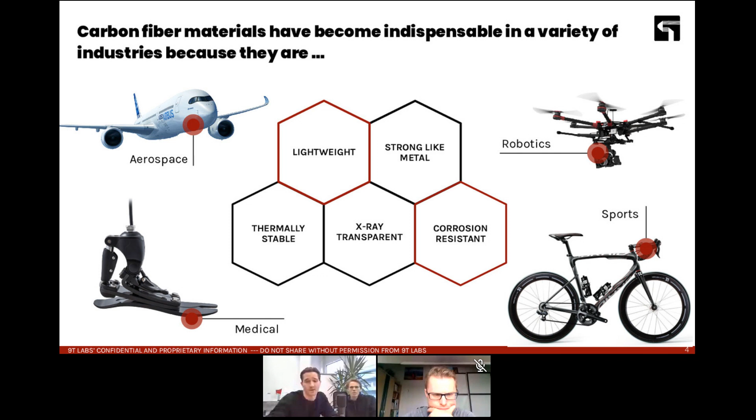Let's jump one step further into the processing of those materials. In a way, there are 2 worlds. One is the manual world, and one is the automated world. If we first talk about the manual world, there's a lot of hand layup. This is an interesting process. It's easy to use, easy to apply for various processing techniques, and it's scalable when it comes to size. So you can manufacture quite big parts, but also really small, tiny parts. This is great, but there are also drawbacks using hand layup. One of the biggest disadvantages is that you actually make a huge compromise on the fiber layup.

And this is not an optimized fiber layup. We only use those fabrics because if we do hand layup, that's the only way workers can actually handle this material. So we do a compromise on the fiber layup, and also, and this is not listed here on the slide, we also have a lot of material waste because we always carve out the geometry out of those fabrics.

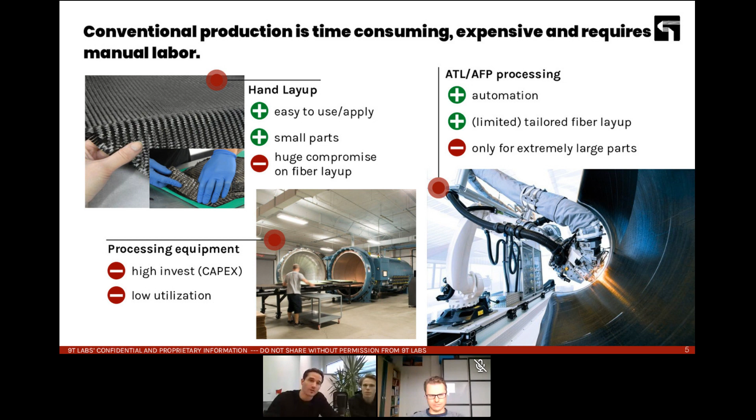If we go one step further and take a look at the next need, which we already touched on in the slide before: automation. A big trend, big need for the industry, usually just to drive down costs, but there's also another factor, and that's the human factor. We can reduce human error, so we have more reproducible layups or more reproducible parts.

And if you have everything from one hand, as we say in German, it also reduces the friction between the individual parties, and so reduces the development times and also the lead times for going from an idea to a final part.

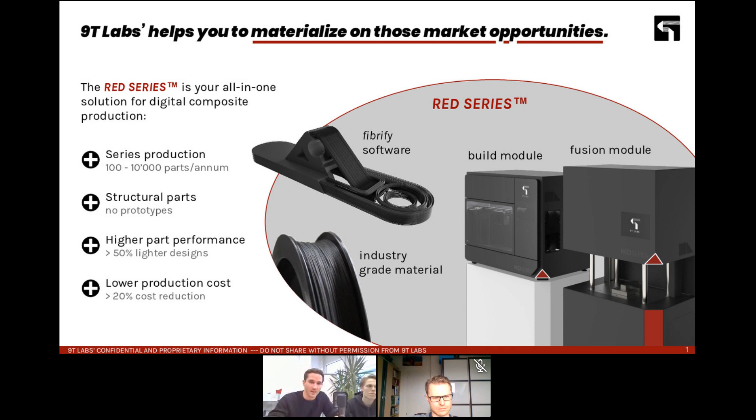So now we talked about the purpose of the RED series. And now I want to explain to you what does it actually bring you? What are the market opportunities that the RED series enables for you? And I group this in two fields. One is metal substitution of CNC milled parts. This is actually a really hot topic.

A lot of people wanted to substitute those really thick and small, quite complex parts with composite materials, but conventional technologies don't really enable this kind of manufacturing, this kind of complexity, this kind of thick structures. And that's exactly what we are offering with the RED series. So you can go into this metal market and substitute existing CNC milled metal parts.

And just imagine, this is actually not getting a slice of the composite market. It's actually expanding the composite market. So it's kind of creating a new market for metal substitution.

And on the other side, we have the substitution of conventional manufacturing technologies. So we bring in the software, we bring in automation, we bring in these integrated workflows to really drive down the cost and reduce the structural weight of parts to get better performance and be competitive in this kind of market. And there it's about substituting existing conventional technologies.

So those are the two big market opportunities, and they are not mutually exclusive, but it's important to understand that one is about expanding the market and the other one is about substituting the existing technologies.

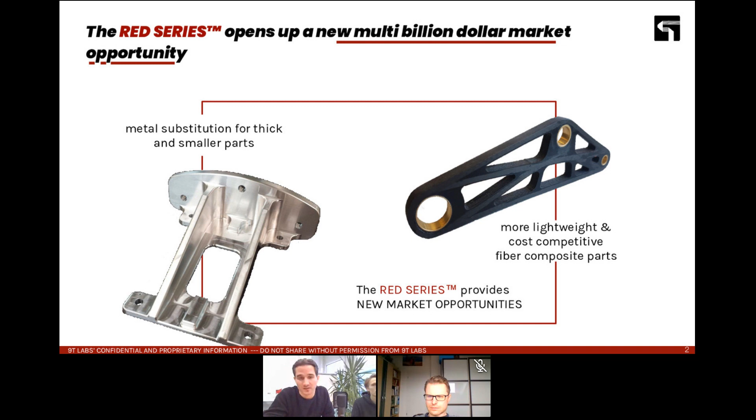Okay, let's move on to how we differentiate from other technologies out there. Maybe a general comment: continuous carbon fiber 3D printing, or continuous fiber printing in general, is actually quite a hot topic in academia, but also a few commercial players are already out there. And you might also know other companies like Desktop Metal, Markforged, and Anisoprint.

And what I want to really explain on this slide is that the differentiation is really driven by the market focus. And our market focus is, as I mentioned before, on structural parts, so load-carrying structures, on series production, not one-off parts. And all the other technologies out there are really serving a different market, which is called the prototyping and jigs and fixtures market. And the requirements for those two markets are completely different.

And if we now go further and talk a little bit about the product offering, I separated this into materials, software, and hardware. We see that actually to serve this market, it requires a completely different product offering. So now let's talk first about our product offering.

So to serve the structural composite market, we need materials which industry already knows. They need to be industry standard, industry grade. And also we have to talk a lot about supply chain, that we are not the only source of material, that we basically have a global supply chain in the background that is really reliable. And we can also ensure the quality of the material first, and then of the parts. And we also have to have competitive pricing. That's simply because if at the end 80 to 90% of the part costs are material costs, this will not enable series production. This will not accelerate the adoption of this technology.

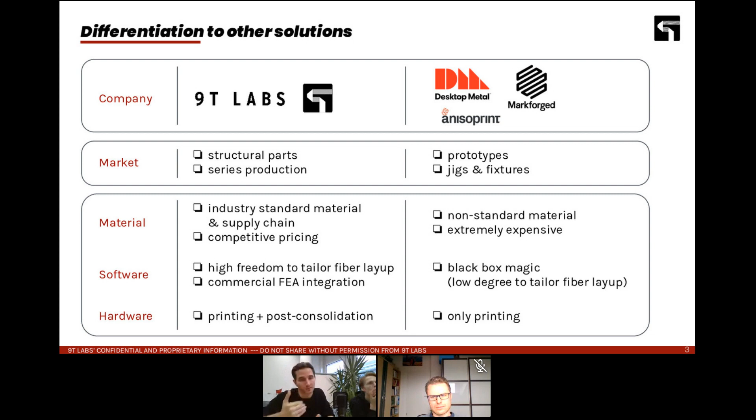And last but not least, on the hardware side for the jigs and fixtures and prototyping domain, all those companies are really just offering a printing system. It's okay because their market does not require any post-consolidation, any enhancement of the part quality. So for me, it was important to showcase on this slide that it's really about the market, and the product offering basically answers those market demands.

So this was the first section, the introduction, introducing the RED series, and now we want to go into the details.

I think I actually have to turn on my sound. I had to put my sound off, so I don't always hear the questions coming in.

Okay, so now it's time to go into the next part of the presentation, which is the product details of the RED series. And we'll start with the materials. So for industry grade materials, at the moment we will offer two materials. One is a PA and the other is a PAEK matrix system with high fiber volume content, 60% fiber volume content, and continuous fibers. So you see that we have really high performance materials, high strength, high modulus, and that's just the beginning. So basically the tip of the iceberg.

We will gradually add new materials to the portfolio, but that's the material offering we have right now and how we launched the RED series. Now, important also to understand is that we are not a material producer. So what we are doing is we certify industry grade material that's already on the market and make it accessible to be printed in our RED series system.

So that has many different advantages. For one, you already know the material you're using with the RED series, but we can also rely on this global supply chain. We might dig in later in the question phase, but I will not talk more about this on this slide now. It's an interesting topic.

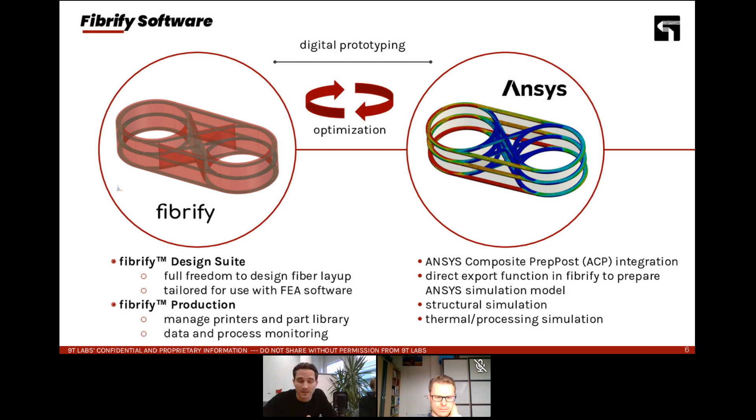So now let's go further into the physical world. Once you have found your most optimal design, then you can apply our additive fusion technology, AFT, which is a two-step process, as I mentioned before. So we have a build module and a fusion module. The build module is where you actually have the automated fiber layup. You can just imagine it as the execution of the software. And it's enabled to do plastic printing and carbon fiber printing. So you can have these hybrid parts, which are quite important if you go to really complex geometries and architectures.

The build volume is fairly big for a desktop-sized machine, so we are 350 millimeters by 270 millimeters by 200 millimeters in build volume, and the system is comprised of a heated print and material chamber. And now, what comes from the build module is actually a tailored preform. That's how I usually call it. And this goes into the fusion module.

In the fusion module, it applies pressure and heat, so it increases the part quality, the consolidation quality. So we're talking about reduced residual void content and also higher interlaminar strength. And what's really unique about this fusion module, it's a completely modular system. So we use rigid tooling to provide the shape and the geometry of the final part, but it's a completely modular system.

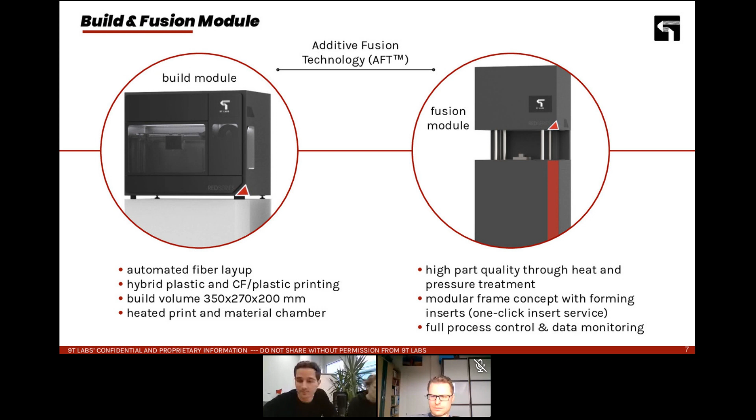Okay, and what comes out of the fusion module is your final part. So you see now here is just an illustration of the part we have seen before. This is an automotive motorsport bracket. I don't want to go into the detail of the application, but it's important to understand that what comes out of the fusion module has an extremely low residual void content. So we're talking about something below 1% void content, and that's important because that's the only way to go into the structural applications and also series production applications.

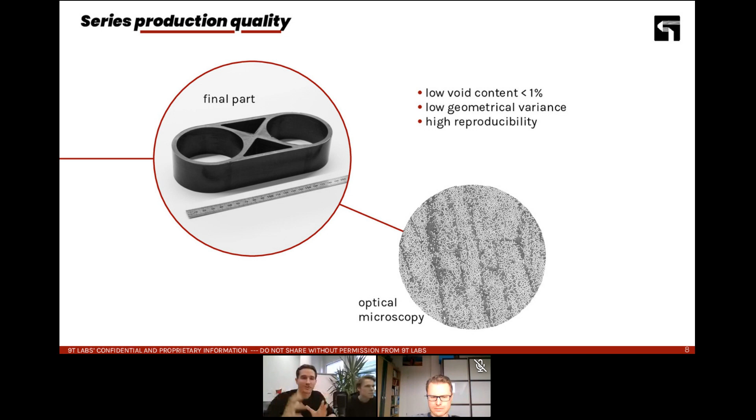And the other two aspects: low geometrical variance, not high. So you have low tolerances and you have a higher reproducibility, which is important, again, for series production of structural parts. In other words, for actual composite parts and not prototyping plastic parts.

Okay, so there are two more slides now on this middle section. One important thing, and that's really interesting to understand. This additive fusion technology enables the combination of multiple parts in this fusion module. And having this kind of feature combined with software we are developing enables the user to split up a part into multiple subparts, for which you can then individually optimize the fiber layup. You can then combine them into a multi-part assembly, go again into the FEA software, into Ansys, make your structural simulation or thermal simulation, and enter this iteration loop.

So you enter this digital prototyping loop, and once you're satisfied, then you print multiple parts, you assemble them, put them into the fusion, and you have a really highly structurally optimized part with really complex fiber orientation. So not just in plane, also out of plane. And that's really unique because additive fusion technology enables the combination, and the software enables this kind of complex fiber architecture on the design and simulation side.

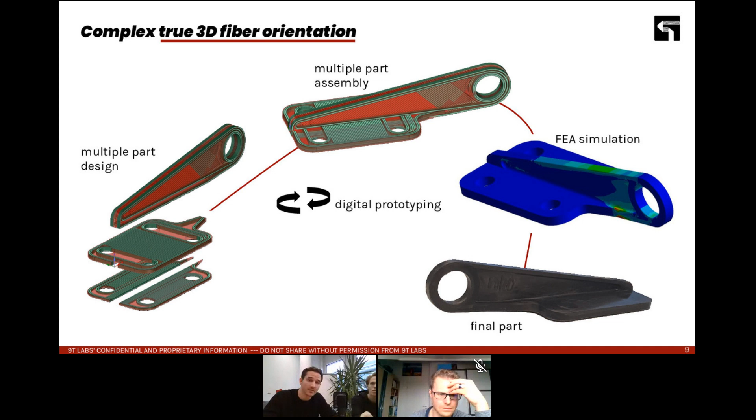Okay, and this is really relevant for metal substitution, and I have also one part here. This is an aerospace hinge. It's actually from a helicopter door. So this is the part you also see now on your slide. And for this kind of case, we want to talk a little bit more about the numbers, about cost and about weight reduction potential.

It's a series production part, so we have a series of around 1,000 parts a year. The material we used here for the metal substitution is carbon fiber PEKK material. And if we now look at the numbers, we could significantly reduce the cost of the parts, around 30% for this kind of series volume. And we can also significantly reduce the structural weight of the component by around 80%. So you see, that's actually quite unique. It's not just about the performance increase, it's also about being cost competitive and even reducing costs in series production. So that was just one example.

We will present just this case now, but over the next couple of weeks and months, we will continuously upload on our new webpage, which by the way should now be online, new use cases, always comparing our technology to conventional technologies, and having the full analysis on the cost side and also on the lightweight potential side.

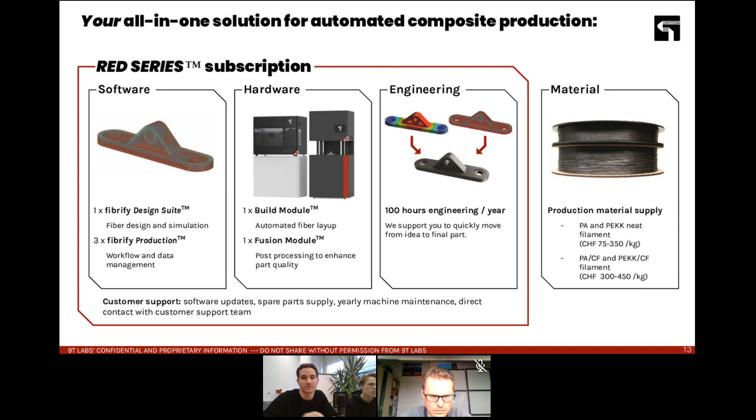Outside of the subscription, but also important for the product offering, we have the materials. We talked a little bit about materials before. Here it's about guaranteeing the supply chain, the prices, and the quality. And that's what we do. You have now two materials in the portfolio, but this will also grow over the next months and years. And I can mention the total at this point. The Red Series subscription is a 2-year subscription, and the basic plan is 75,000 euros a year, with the software, hardware, and engineering included, what you see here on the slide. We can talk more about this in the Q&A section if there is a question.

And then going into the customer support. There are different things, but one is really that we have a close relationship. It's about going quickly from the idea to the final product, and we want to help you, we want to support you. That's why on the slide before you have seen the 100-hour engineering service included in the basic plan of the subscription, because we know it's important to go from the idea to the final product. And then there are other aspects like direct service contact, like you have a direct point of contact on the 9T Labs side.

And we also have, this is interesting, the predictive maintenance feature. You hear this a lot now, it's kind of a buzzword, but we can really do this because our software gives us access to how much you use the system, and we know about the wear of the parts, let's say the pressure foot, anything that has wear. We can predictively substitute and send you spare parts before the machine shuts down and you are left with no machine to produce parts.

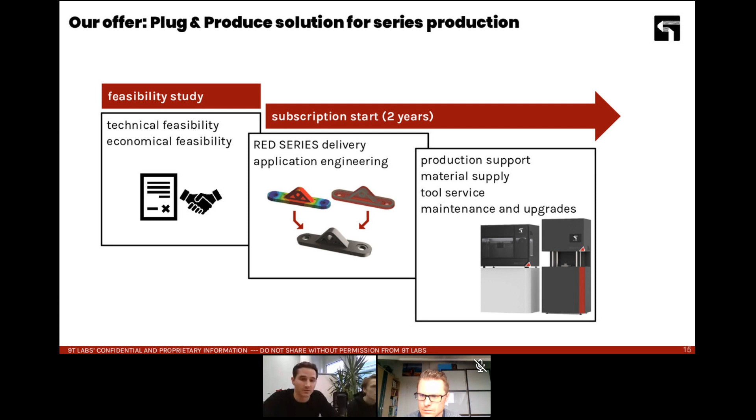Okay, so last slide. Just one more thing about this feasibility study. So this is the first step in. I think it's important for you guys to understand what this is. So basically there's input and output, and the input we need for this feasibility study from your side is ideally a STEP file, so a part design, and as much data on the part as possible. So production volume, boundary conditions, like load cases, etc. Maybe also thermal conditions, as much data and information on the part as possible, because that really enables us to put together what we sometimes call an executive summary.

So our output from this feasibility study for you is then a recommendation on the material side, and we have an analysis on the different potentials, lightweighting potential, cost potential. So how much we can drive down the cost in manufacturing for the different series volumes, etc. And this is nicely packed into this executive summary. That's what we will provide to you. And this is the first step in, and I want to encourage you to enter this discussion with us so we can enter this feasibility study and really see if this technology, the Red Series, makes sense for your applications in your industry.

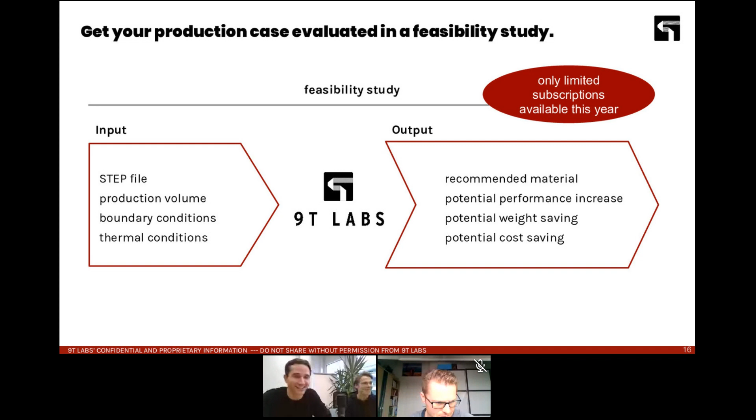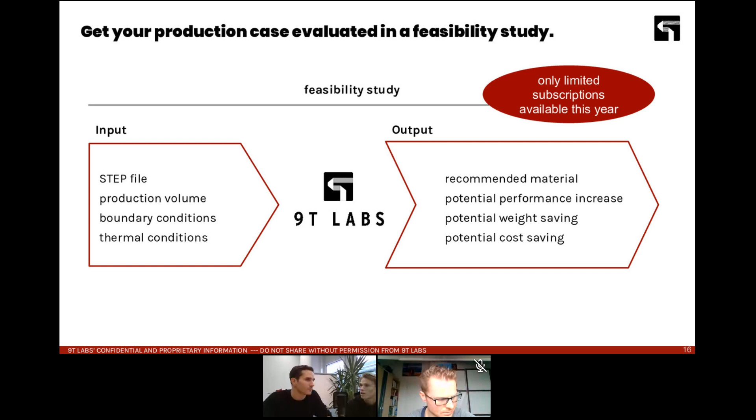Maybe to start, because there were a lot of questions on material, both on the material form that we supply as well as on the thermoplastics. Could you say a few words about what material form it is, and secondly, why we, for example, chose to go for PEKK and not for PEEK, and what the material roadmap is? Okay. Let's also quickly go back to the slide, so we can have an image as well.

So first talking about the feedstock material itself, the physical side of it. We are using for the Red Series technology tapes, which are really slender slitted tapes, and that's the unique part of it, because we make our Red Series process accessible to those kinds of materials, like the slitted tapes.

And tapes are a common material in the market, so we have access to this already broad spectrum of materials. And important is that it needs to be a certified material too, so we can ensure that it's reliable and that you don't have any struggles in the production. So that's why we have only the two materials for now in the material portfolio. That was a little bit on the first part, on the feedstock side and material.

And now talking about... Yeah, maybe let's stay on this topic for just one second more, because I see a bunch of other questions come in. Can you say something about the cross section of the filament, and the number of fibers in the filament? So approximately, the systems we are offering now as the first materials in the portfolio have around 2K. It's a 2K filament.

So it's quite a slender filament, gives you a good resolution, and over the years we can even go smaller, but we also can go higher, and there will be a portfolio of materials on that side, because if you don't need such high resolution, you might go with a 3, 4, 5K material.